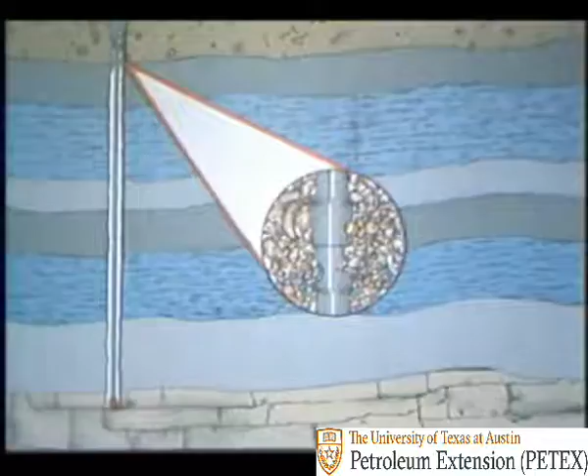Another formation contains fresh water that a nearby town uses for drinking water. It must be protected from contamination.

Another formation below contains salt water. This salt water could pollute the freshwater zone above. Something must be done to overcome these problems.

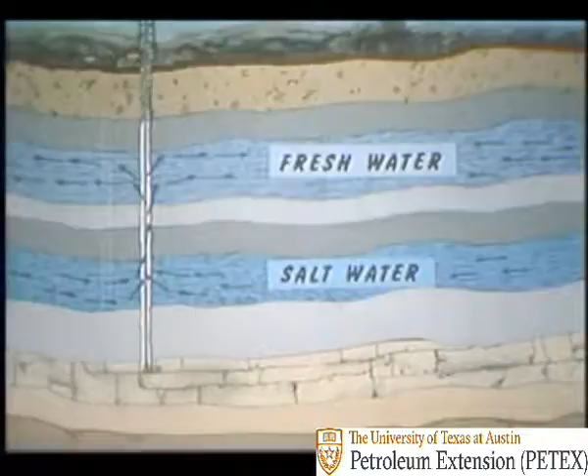So drilling comes to a temporary halt in a formation that is made up of good, firm rock. This hole will be lined with a special kind of pipe called casing.

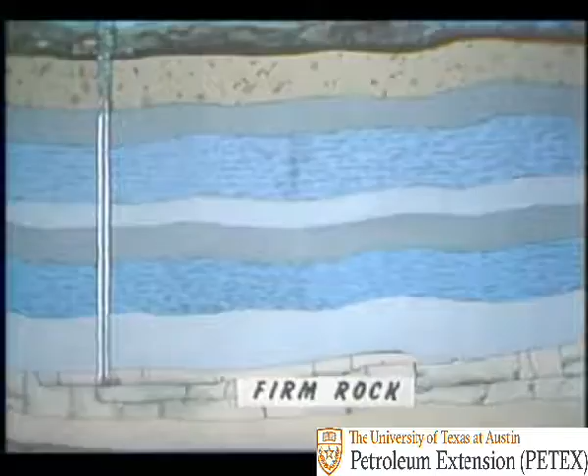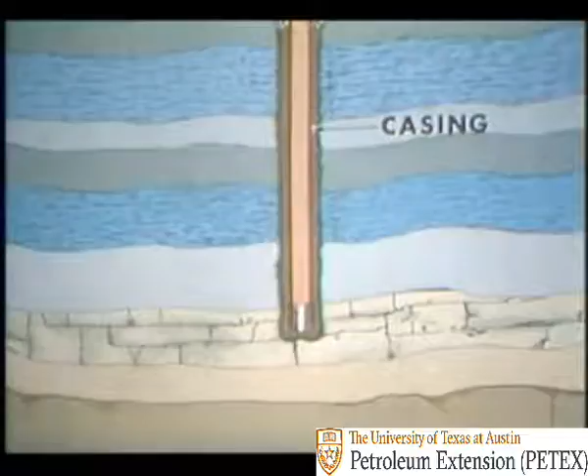Then cement is placed around the casing. The cemented casing protects the freshwater zone. Also, the cement supports and protects the casing.

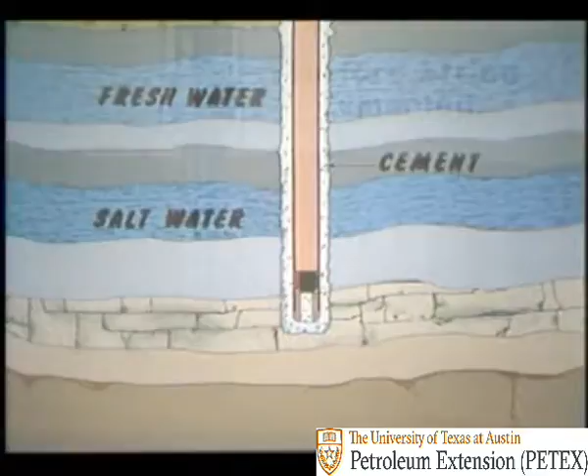After the first, or surface string, of casing is cemented, drilling starts up again. The drill passes through many formations. Some give problems that call for casing and cement.

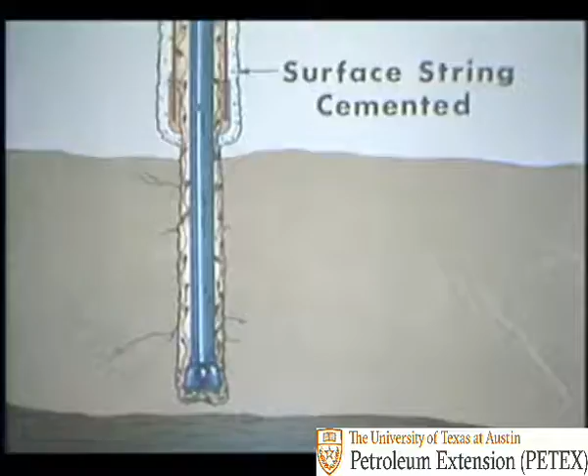Maybe a shale is encountered that swells and sloughs off into the wellbore, making it hard to keep the hole clean.

Here's a formation that contains salt water under tremendous pressure. When penetrated by the drill, it will try to blow out, but the drilling crew will be ready for it.

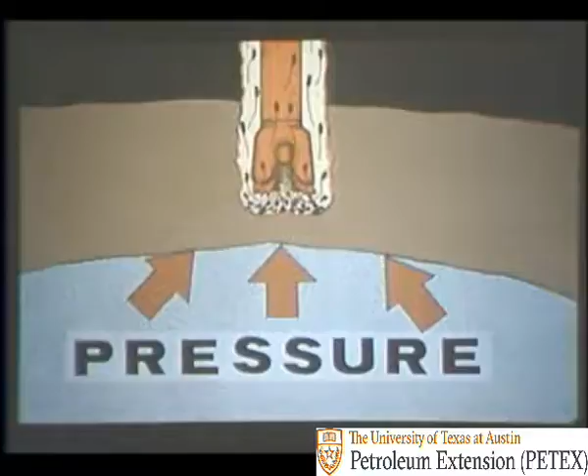Another formation is made up of fractured and broken rock. Because drilling fluid could be lost to the formation, it is called a lost circulation zone. Again, the crew will be ready for it.

And here is firm rock again, a good place to temporarily halt drilling. Run inside the surface string, a smaller diameter string of casing is set and cemented.

The smaller string runs upward all the way to the surface, but the cement outside the smaller string may or may not go all the way up. In this case, it is not necessary.

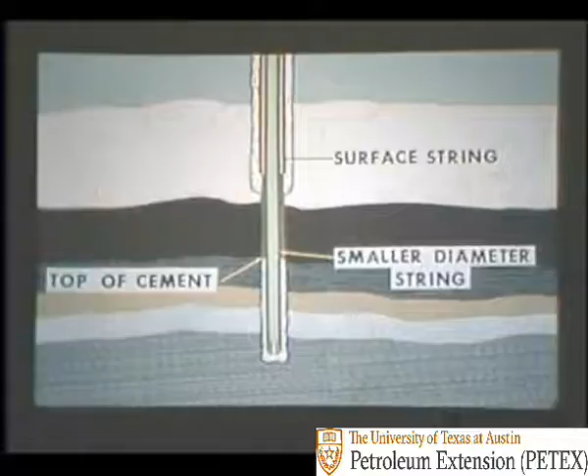Once again, drilling continues, this time to the target, the reservoir of gas, oil, and salt water. The reservoir has oil with gas on top and salt water underneath. Neither the gas nor the water should be produced with the oil.

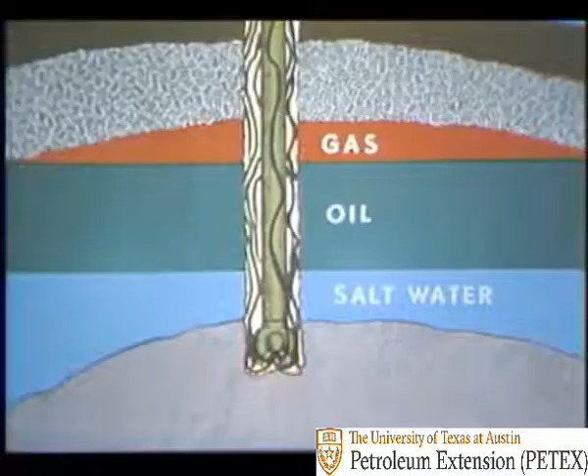To prevent water and gas production, casing and cement is used again. A third string of casing, called the production string, is set and cemented through the reservoir.

Perforations are made to allow only the oil to flow into the production casing. The gas and water are kept out.

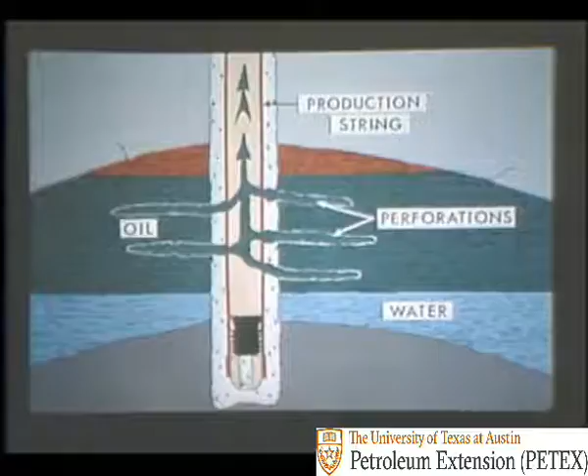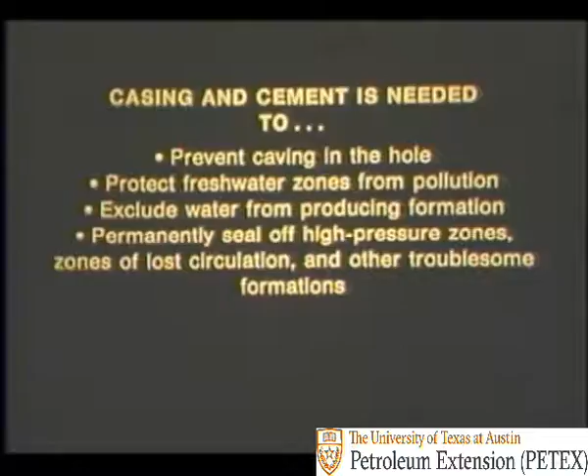So casing and cement is needed to prevent caving in the hole, protect freshwater zones from pollution, exclude water from the producing formation, and permanently seal off high-pressure zones, zones of lost circulation, and other troublesome formations. Now let's see how casing and cementing operations are carried out.

First, here's the drilling assembly in the hole. Before the casing is run, the drill stem will be removed, leaving the hole full of mud.

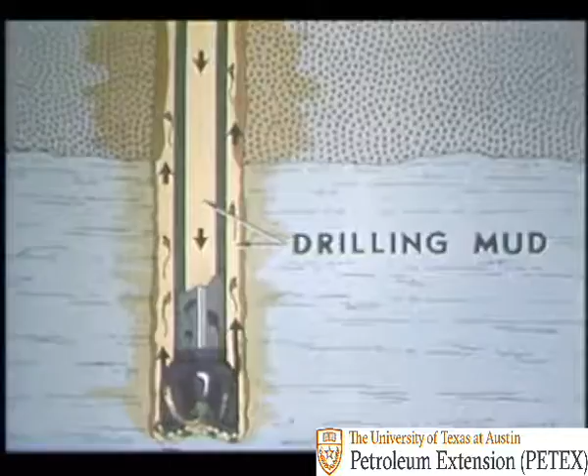But it is important to circulate first so that the hole and mud can be put in good condition to receive the casing. All or most all of the cuttings need to be circulated out.

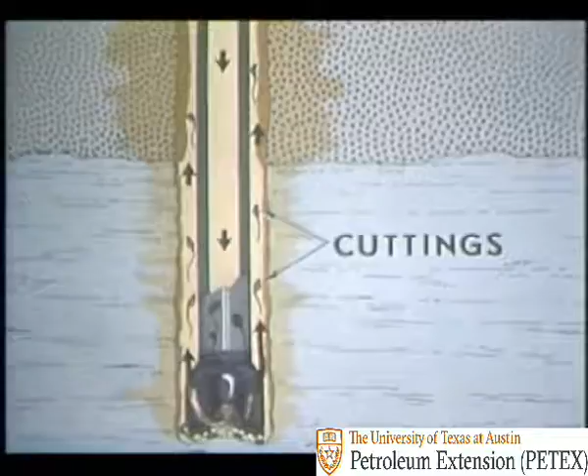Any thick portions of solid mud, wall cake, need to be circulated out as much as possible.

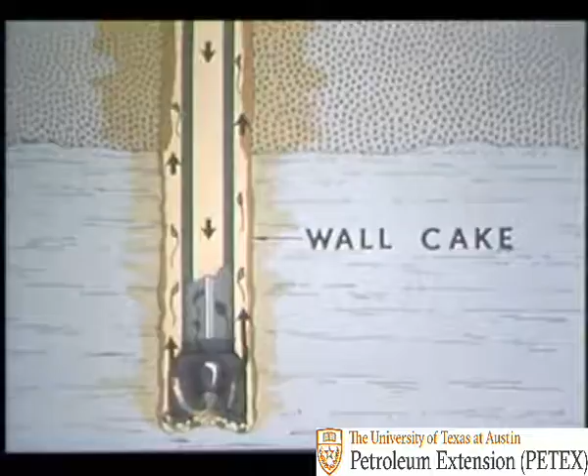And during circulation, the mud engineer tests the mud. It should be the proper thickness or viscosity, the right weight or density, and so on, to make it as easy as possible to run the casing and get a good cement job.

Once the hole and mud are conditioned, the crew trips out the drill stem. Then the first joint of casing is raised into the derrick.

Often special pieces of accessory equipment are attached to the casing. These accessories aid in obtaining a good cement job.

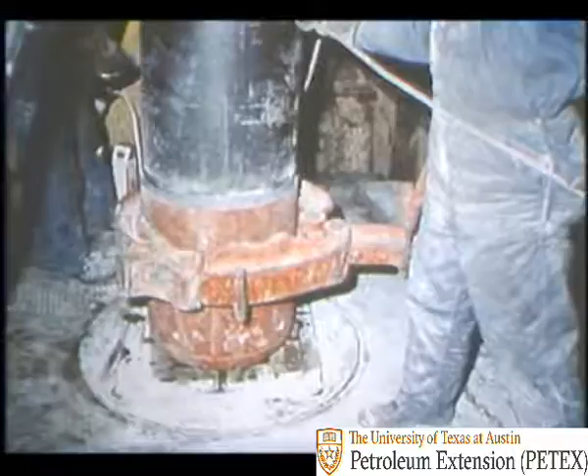This round nose device, called a guide shoe, is installed on the first joint of casing. Thread locking compound is used on the threads to keep the shoe from coming unscrewed.

A cross-section of a regular guide shoe shows that it is a heavy collar with a round end. It guides the casing into the hole. Also, it has an opening in the bottom to allow drilling mud to enter the casing as it is lowered in. Later, cement exits through this opening.

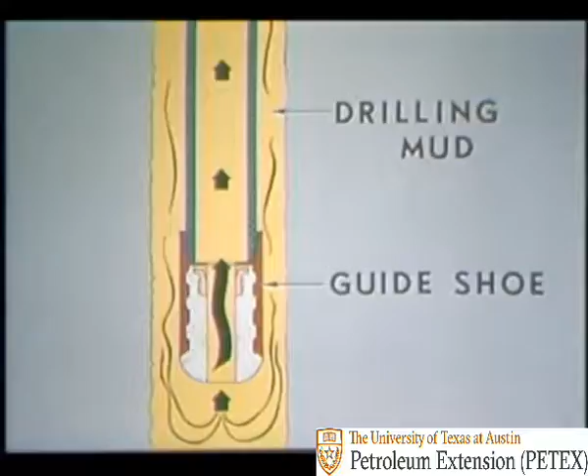Sometimes, instead of a regular guide shoe, a float shoe is used. As the casing is lowered into the mud-filled hole as at left, the mud cannot get past the closed valve. However, as at right, the valve opens when mud is put into the casing.

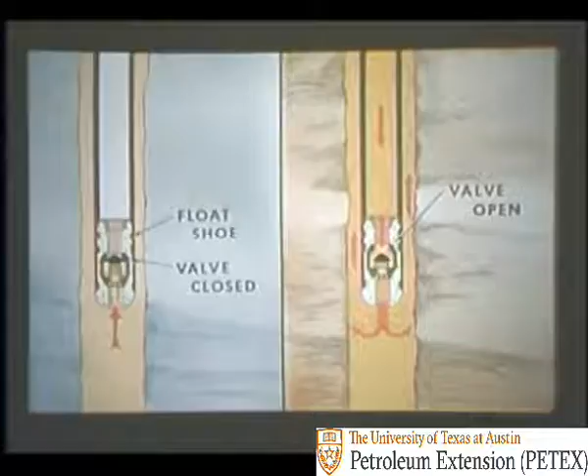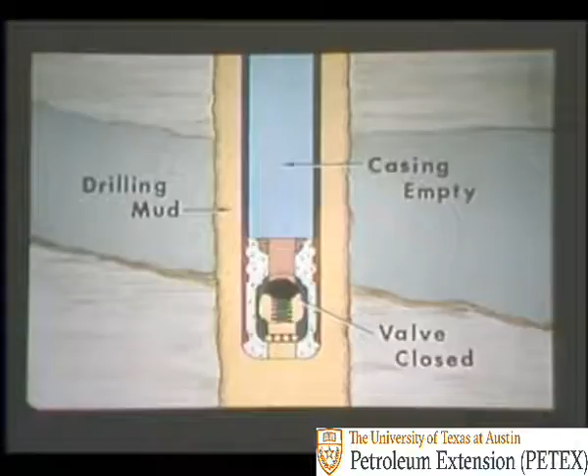A float shoe makes it possible to float casing into the hole to ease some of the load on the rig derrick. If the casing is empty and there is drilling mud in the hole, then the casing tends to float, much like a boat floats in water. Since some of the weight of the casing is floating, then some of the strain on the derrick is eased.

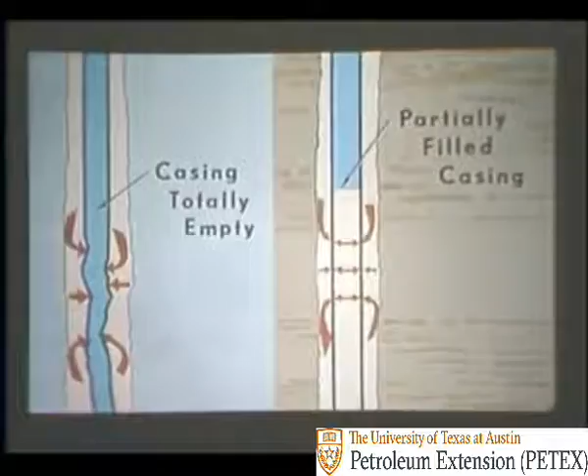An automatic or differential fill-up shoe is sometimes used. It automatically regulates the amount of mud in the casing. At first, the valve in this shoe keeps mud from getting into the casing, but only to a point.

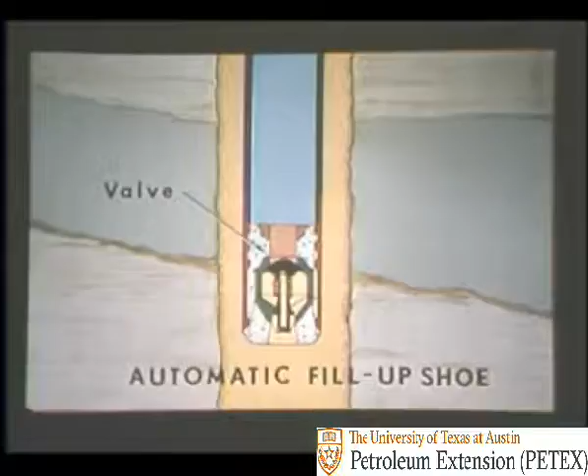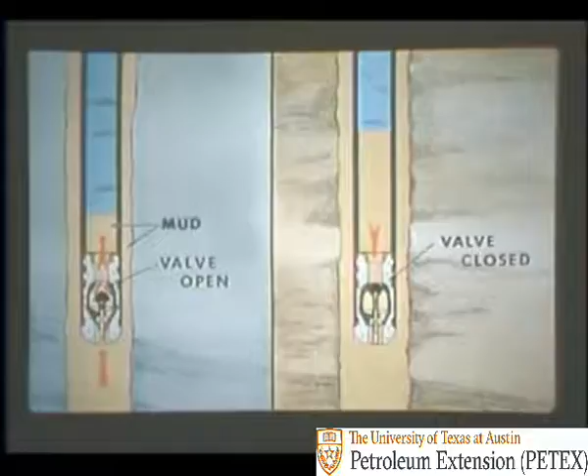As the casing and differential fill-up shoe get deeper and deeper into the hole, as at left, mud pressure causes the valve to open and mud enters the casing. However, as at right, the mud pressure in the casing finally closes the valve. The valve closes before the casing is completely filled, so all the flotation won't be lost.

When the casing string lengthens and goes deeper into the hole, as at left, the valve opens again, allowing more mud in, until, as at right, the valve again closes. This opening and closing is repeated as the casing is run.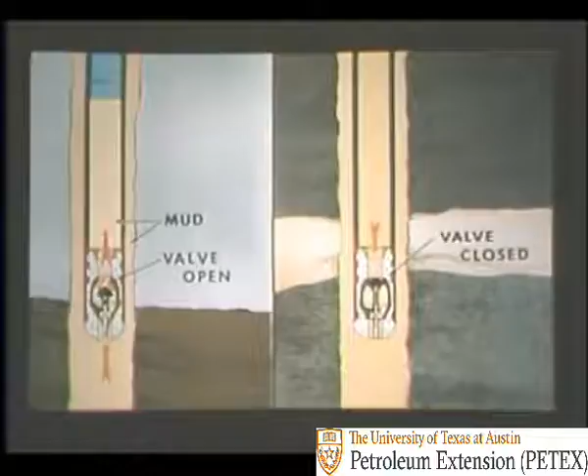A float collar is similar to a float shoe. Mud cannot get past the valve and into the casing because the valve closes. This allows the casing to float. However, mud and cement can be pumped through the valve because it opens with pressure from above. Incidentally, there are also automatic fill-up collars available that work like the automatic fill-up shoe seen earlier.

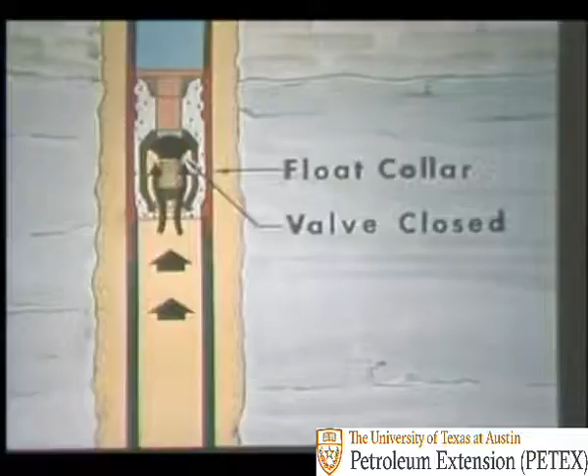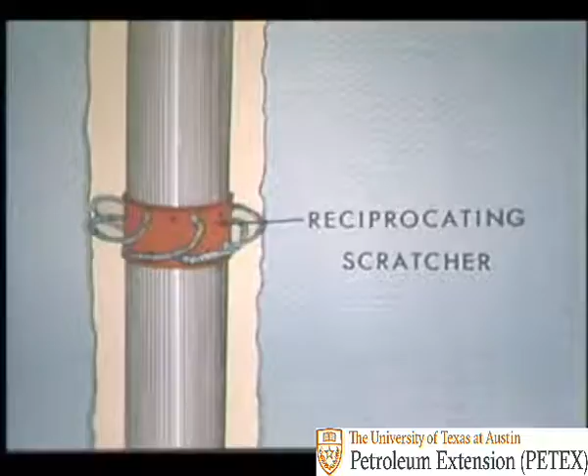Scratchers are also installed on the casing. This is a reciprocating scratcher, which means that the casing string has to be moved up and down for the scratcher to work. Scratchers remove some of the wall cake so the cement can bond better on the walls of the hole.

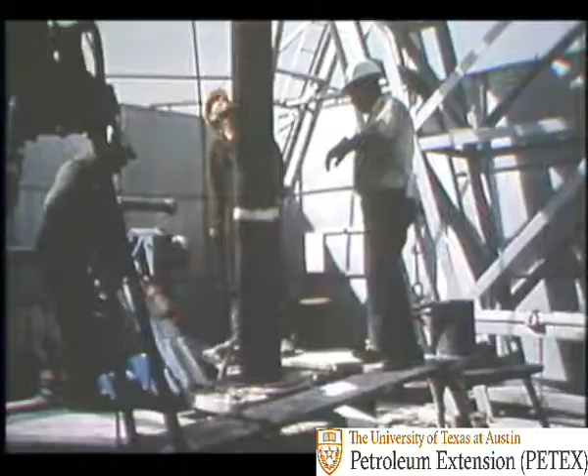Casing should not be lowered into the hole too fast. 1,000 feet per hour might be a good maximum speed. However, if there are formations that fracture easily, slower running speeds are necessary.

Do not create pressure surges. Casing in a wellbore is a lot like a piston in a cylinder. The faster the piston moves through the cylinder, the more pressure is built up.

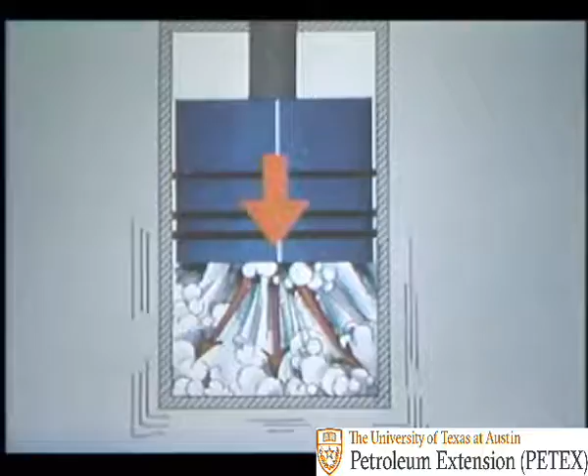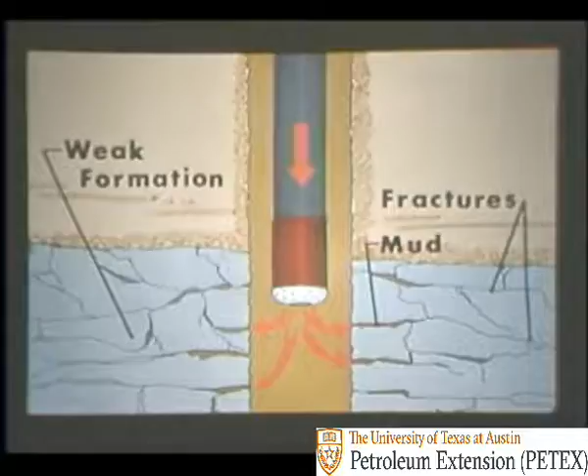If one of the formations is weak and fractures easily, pressure surges could break down the formation, mud could be lost, and an expensive, time-consuming problem would have to be corrected before operations continue.

As the casing is made up and lowered into the hole, and if an automatic float shoe or collar are not being used, drilling mud is added from the surface. We want the casing to float, but we sure don't want it to collapse.

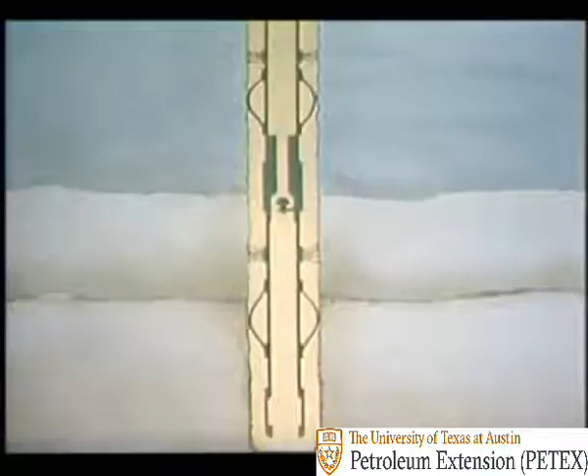While circulating, let's look at the casing and accessories in the wellbore. Starting from bottom are the guide shoe, centralizer, and scratcher. Above are the float collar, more centralizers, and scratchers.

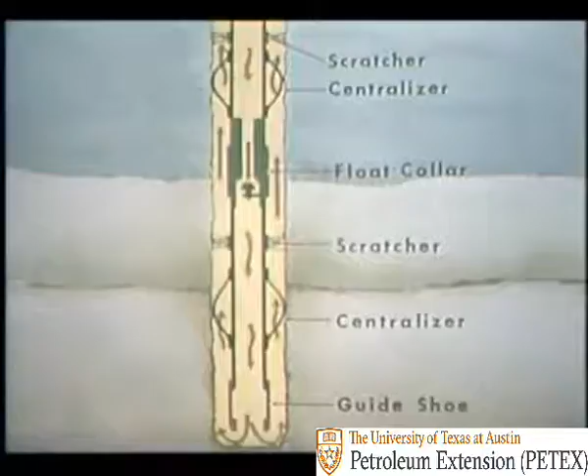Mud is circulating down the casing and up the hole. The centralizers are keeping the casing off the sides of the hole, and as the casing is moved up and down, the scratchers are removing some of the wall cake to improve cement bond to the formation.

With the hole conditioned, about 10 to 50 barrels of water or special chemical spacers or flushes are pumped in. The water or chemical helps to remove wall cake and acts as a spacer between the mud and cement. With the spacer, the mud won't be likely to contaminate the cement.

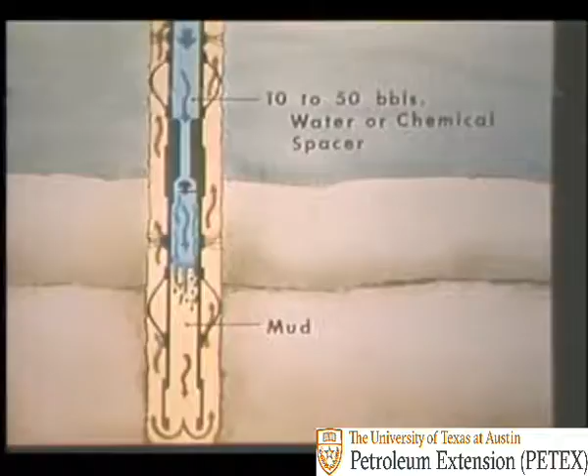The trucks carrying the needed amount of dry cement are in position on this land rig. Of course, offshore, or in a marshy location, boats and barges are used. Or sometimes the bulk cement is stored in large bins at the rig.

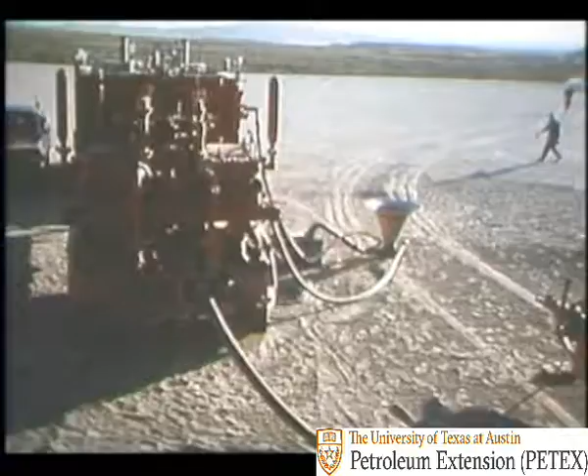Also, the special cementing unit, truck-mounted for this land job, is made ready. Two pumps are provided on this unit, one for pumping water to mix with the dry cement, and the other to pump the mixed cement into the well.

Speaking of water, the quality of the water should be good, clear, and free of salt. If you can drink it, it's probably okay for mixing. However, seawater is used offshore with good results.

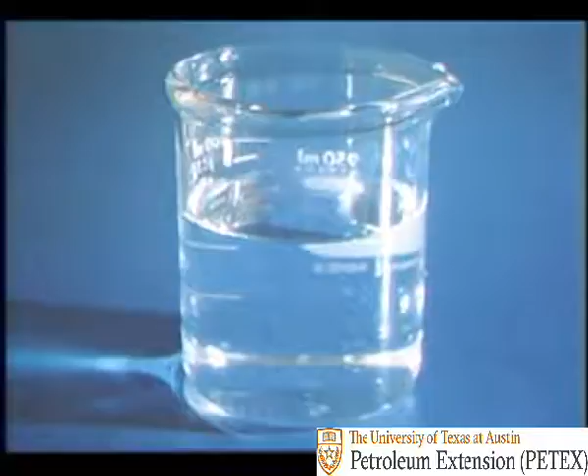The water's temperature is a consideration. Hot water may thicken the cement slurry, making it set too fast. Cold water may retard or increase the set time or freeze up in a line during winter operations.

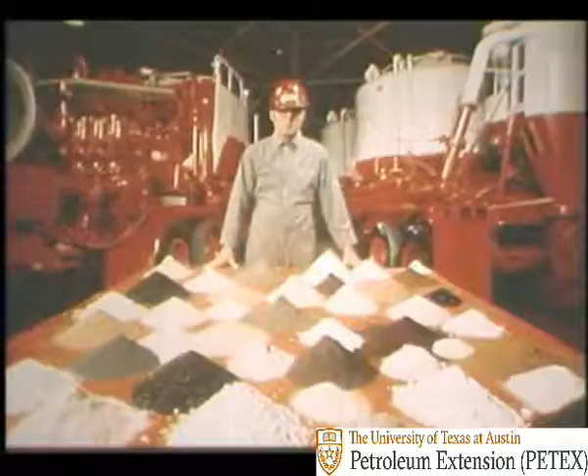There are many additives that can be used in the cement to offset temperature problems and other problems that may occur on a particular job. The cementing service company can tailor the cement to meet various requirements.

In any case, the dry bulk cement is fed out of the container and into the hopper of a mixing device called a jet mixer.

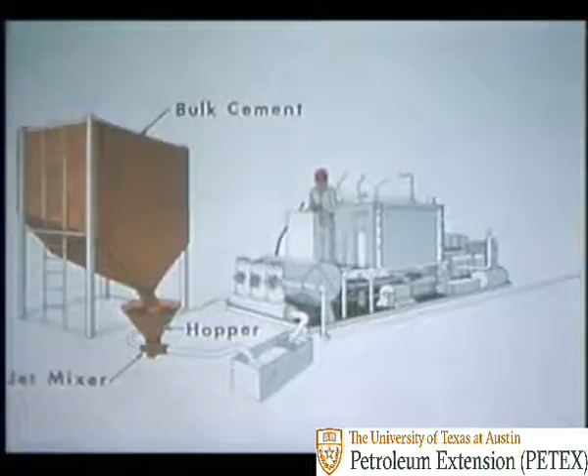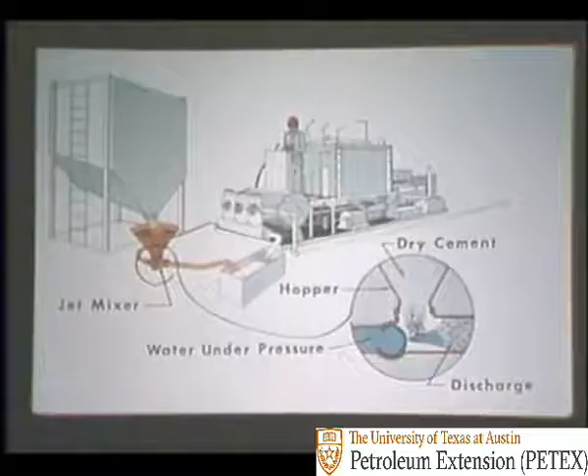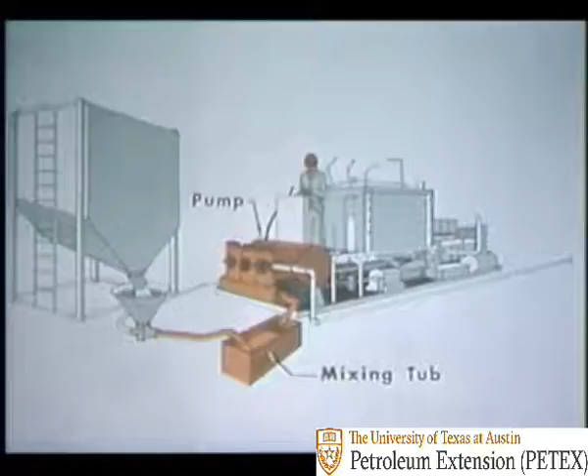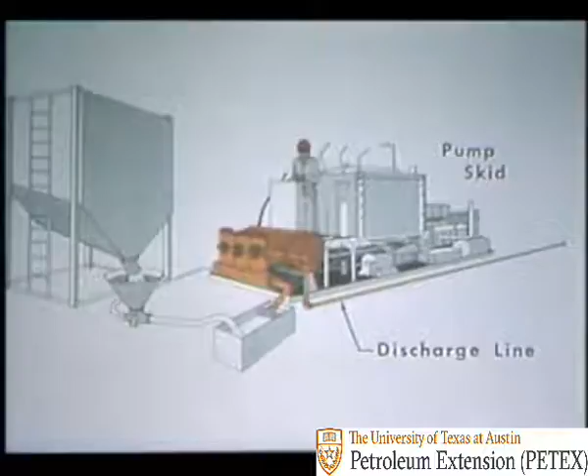The mixed water and cement, the slurry, is discharged into one side of a mixing tub. The inlet line to the pump on the cementing unit is placed in the other end of the tub. The pump picks up the slurry and sends it through a discharge line.

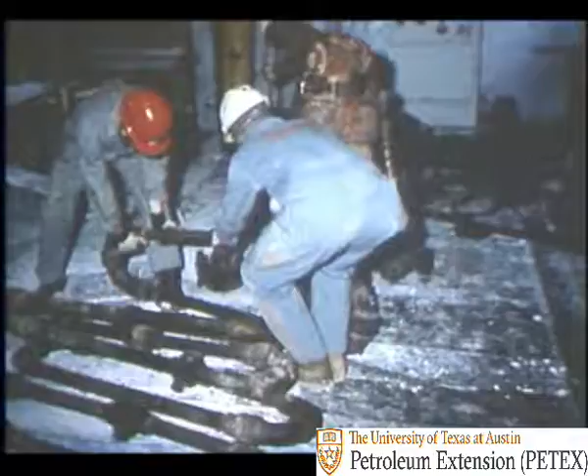The discharge line is connected to the cementing head or plug container on the rig floor. Also placed in the cementing head are a couple of devices not mentioned before: a bottom wiper plug and a top wiper plug.

The first plug to go into the cementing head is the bottom plug. It wipes mud off the inside of the casing and keeps the mud separated from the cement. Notice the diaphragm. In a moment, we'll see what it's for.

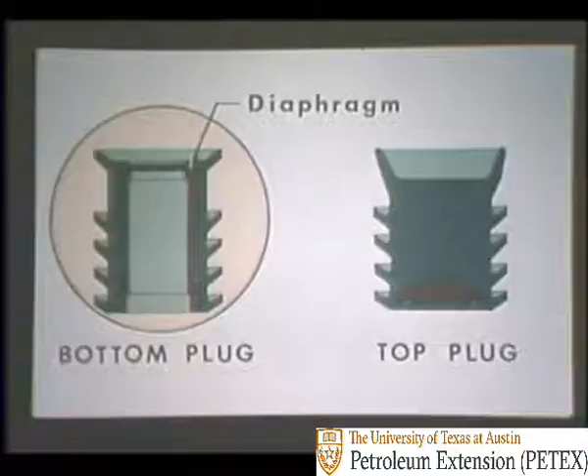The top plug follows the cement into the casing and wipes cement off the casing. Also, it reduces the mixing together of cement and the mud behind the cement. This plug is solid.

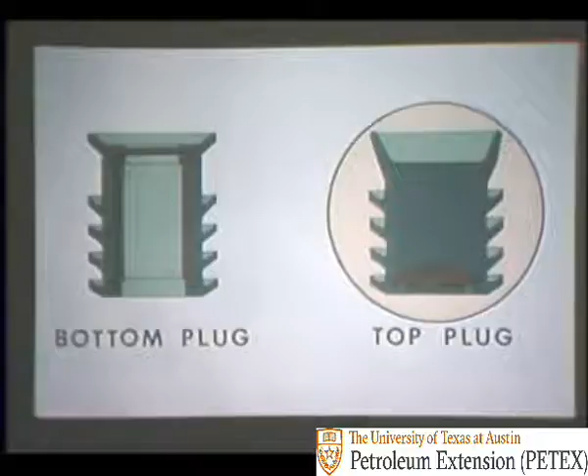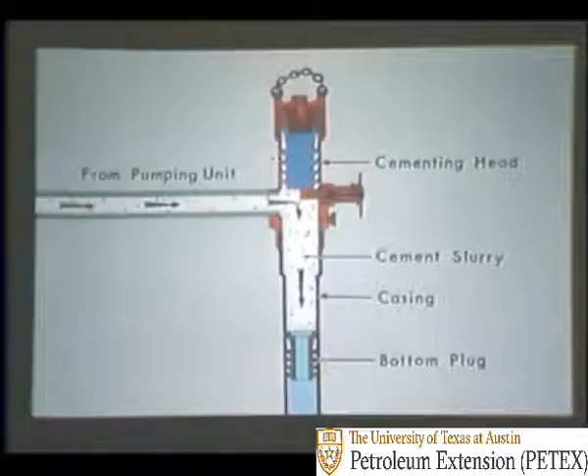As the cement slurry from the pump discharge, entering from left, reaches the cementing head, the bottom plug starts down the casing with slurry behind it.

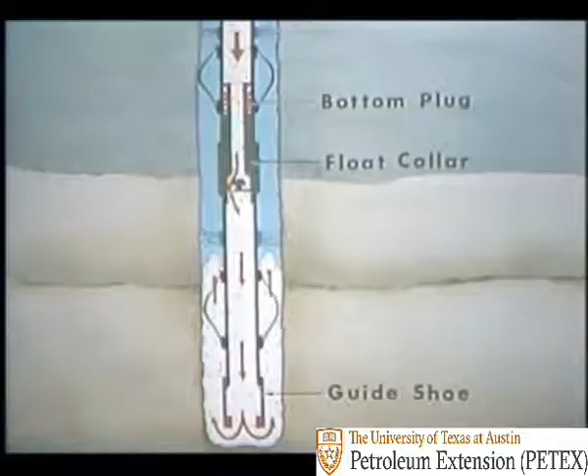When the bottom plug reaches the float collar, it stops. Pump pressure increases and ruptures the diaphragm in the plug. The slurry goes through the open valve in the collar, out the guide shoe, and into the annular space between the casing and hole. Meantime, the casing string is being reciprocated or rotated to help displace the mud.

Usually, the cement slurry is pumped with enough pressure to create turbulent flow. Under turbulent flow, eddies and currents help move all the mud out and help remove uncirculated mud and wall cake by scouring.

The familiar mud balance can be used to check the weight of the cement slurry as it is pumped. Sometimes an automatic weighing device is used if greater accuracy is needed.

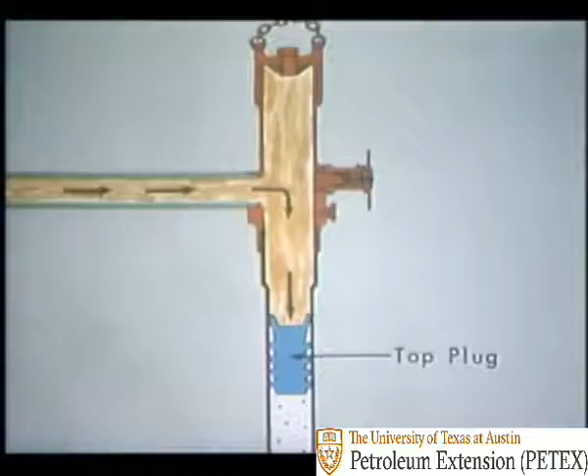Once the calculated volume of cement has been pumped, a retainer pin is pulled to release the top plug from the cementing head. The top plug is followed by drilling mud. When the top plug seats or bumps on the bottom plug at the float collar, pump pressure increases, since no fluid can get past the solid top plug. This signals that all the cement slurry is displaced from the casing above the top plug.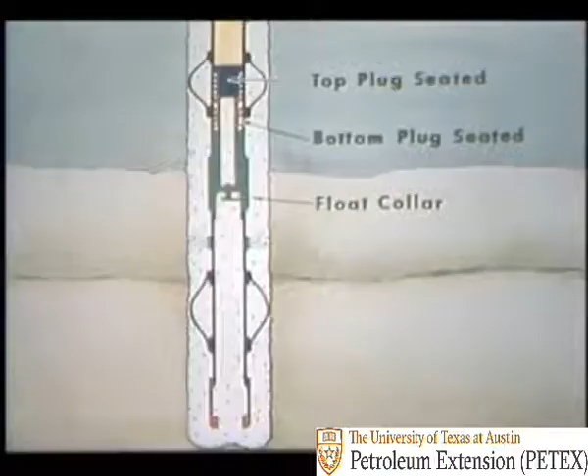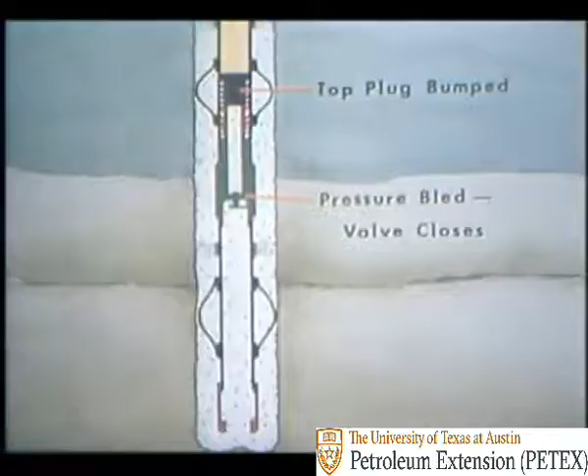After the top plug bumps, the pump is shut down and pressure on the casing is bled off. With the pressure released in the casing, the valve in the float collar closes to keep cement from backing up in the casing.

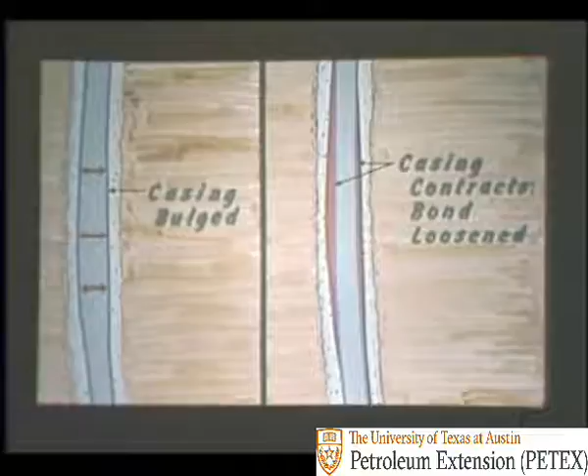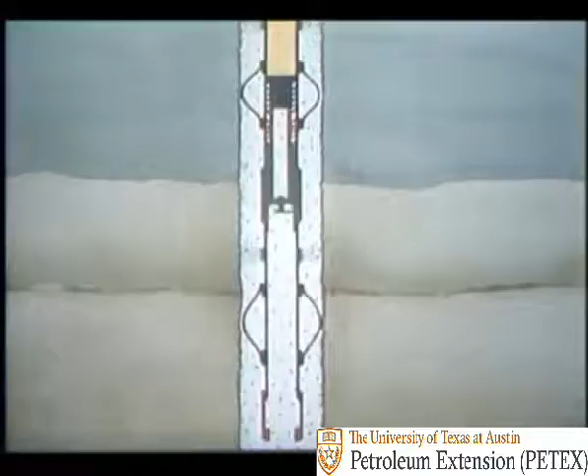After bleeding the pressure, the time comes for waiting for the cement to harden. This is called waiting on cement, or just WOC. Through the years, WOC time has been reduced.

Back in 1903, there was a wait of 28 days before operations continued. In 1930, the time was reduced to 3 days. By 1945, to 24 hours.

In 1957, rig operations were studied to see if WOC regulations could be reduced still more. As a result of the studies, present-day WOC time can be as low as 6 to 8 hours in winter and 3 to 6 hours in summer, provided that good practices are followed and state regulations allow it.

WOC time gives the cement enough time to set and be strong enough to bond and anchor the casing. Also, the cement must be able to take the shocks of subsequent operations, like drilling out. Zones must also be sealed off to prevent fluid in the zones from moving out.

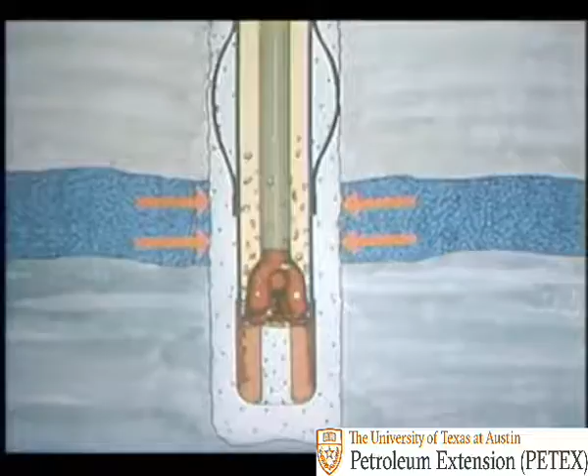WOC time varies from state to state because of state regulations. In addition to regulations, operators rely on their own experience.

Also, the casing must be landed. The top joint of casing is suspended in a hanger inside the casing head at the surface. In most cases, casing should be landed in the head as cemented. That is, the casing is landed without slacking off or picking up on the casing. The casing hanger supports the same weight as the elevators.

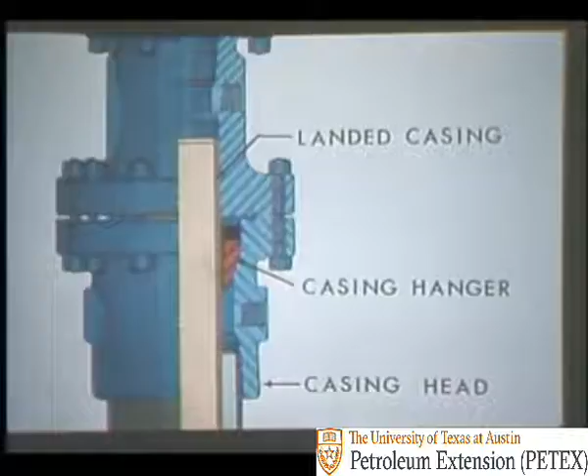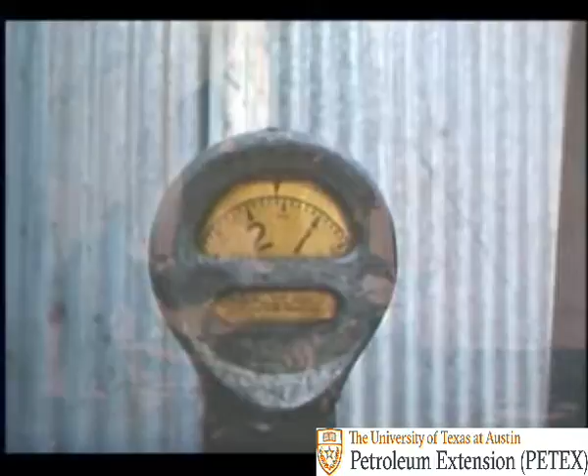Once landed, the blowout preventers are attached to the casing head. Then, after WOC time, the casing and cement is pressure tested.

This is just a matter of using the mud pumps to pressure up to a desired amount, say 1,600 pounds per square inch, and holding the pressure for 30 minutes. If the pressure drops no more than about 50 pounds per square inch, then the job is satisfactory.

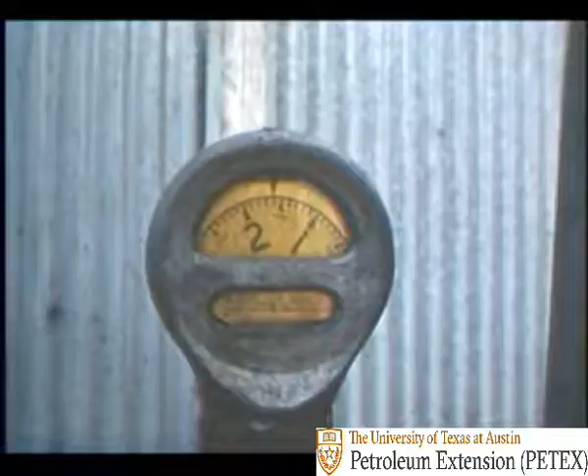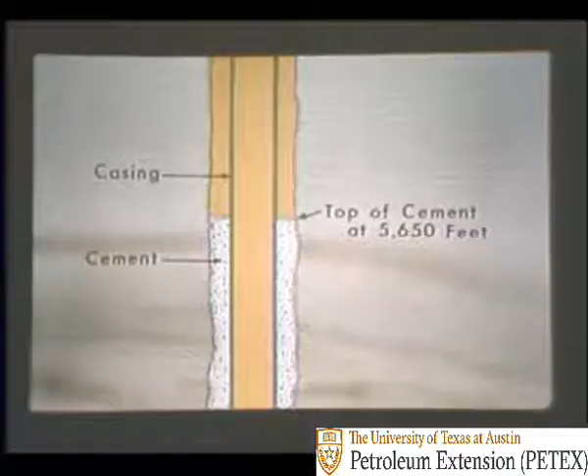Also, it is usually necessary to find the top of the cement to make sure the cement has been displaced properly. In this case, the top should be at 5,650 feet.

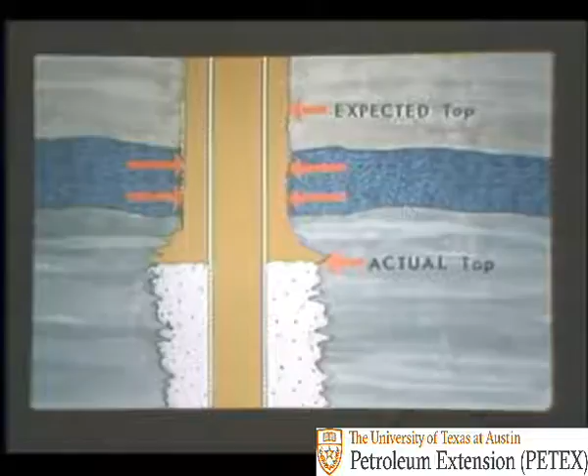On the other hand, if the actual top came out considerably below the expected top, then perhaps a large washed-out section took a lot of cement to fill. If the cement top is too low, maybe allowing formation fluid to enter the annulus above the cement, then a remedial cement job is needed.

Another problem occurs when the actual top comes out higher than the expected top. In this case, as in the circle, the cement channeled around gelled drilling mud, leaving an uncemented area where fluids or gas may communicate between zones.

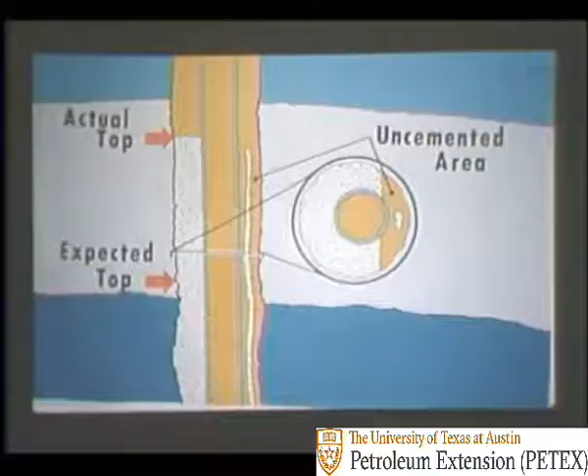In conclusion, cementing is a critical operation. It calls for careful planning, selection of the proper cement, casing, equipment, and good techniques. Close cooperation between the operator and the cement servicing company is essential.